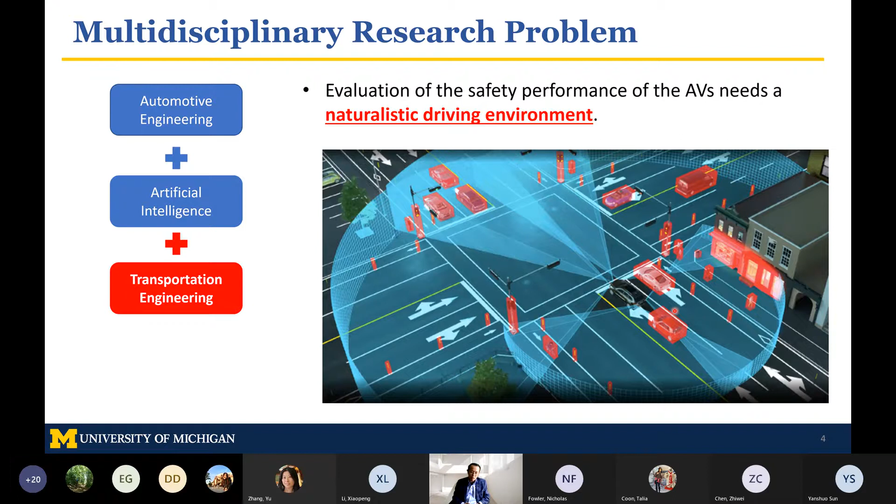So as transportation engineers, we study the traffic environment. We study this naturalistic driving environment in terms of the traffic flow, the traffic control devices, and multimodal transportation. So we do have a stake in it, and this problem indeed is also a transportation engineering problem. And my group has been working on this starting roughly 5 years ago in 2015 and 2016, and was also involved with the M-City test track construction at the time to test autonomous vehicles, which we're going to talk about a little later in my presentation.

So I have repeatedly mentioned the naturalistic driving environment. So what is a naturalistic driving environment? How do we model it? I'm going to start with a set of decision variables, and those decision variables involve multiple road users. Here, let's say all the vehicles surrounding the subject vehicle, and also a time duration. So it's not only a number of vehicles, but also across some time duration, from the current moment to some time into the future. So if we simulate such a naturalistic driving environment, essentially we're sampling from the distribution coming from the real-world traffic environment.

So the challenge to build such a naturalistic driving environment is, first of all, that the dimensions of the decision variables X are very, very high. Think about it: if you model a lot of vehicles over a long period of time, the matrix will become very big, and so the number of variables will become really high. The other one is that when we say we want to test this autonomous vehicle in a naturalistic driving environment, the joint distribution needs to be consistent with that of the real world. And that's also particularly challenging because of the high dimensionality of the naturalistic driving environment.

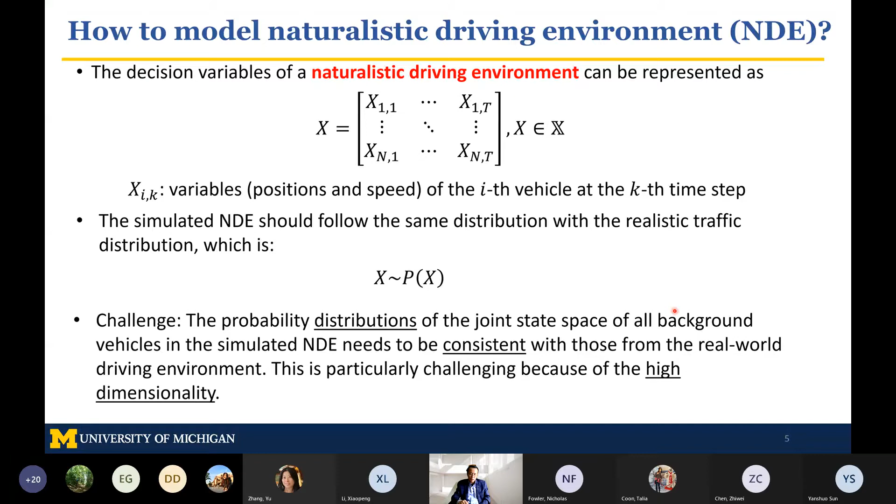And in terms of the high dimensionality, the reason we have such a high dimensionality is because the number of scenarios we need to test is very, very large, it's innumerable. For example, some of the variables could be static variables related with weather, number of lanes, speed limit, and configuration of the geometry. And those are all scenarios we need to consider.

And also there are dynamic variables involved with surrounding vehicles, their position and speed, range and range rate, and cut-in angles and things like that. It's all the decision variables you will need to consider. And remember, this is not only just one vehicle, there are multiple vehicles surrounding the subject vehicle under test.

You also need to consider multiple maneuvers in combination of these, and some of these may be in a free flow driving situation, some in a car following situation, lane changing situation, and so the number of maneuvers to be considered is also very, very big. So if you multiply all these together, there's no way we can enumerate the scenarios we need to test.

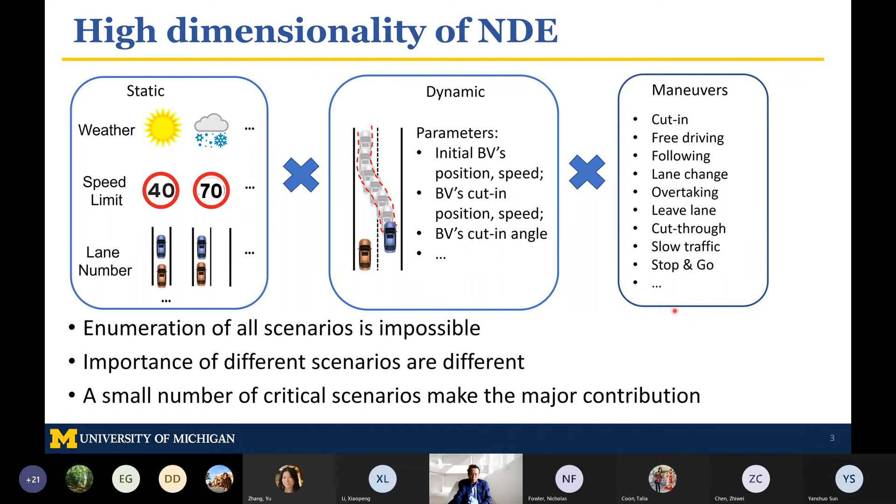So when we say we test an autonomous vehicle, what do we mean? If we put the agent into this naturalistic driving environment, essentially what we're trying to estimate is the probability of an accident occurring, right? A represents the event of interest, which in this case is an accident, and we're trying to estimate the probability of that happening. And we can decompose that into the product of two probabilities. One is the probability of the scenario occurring, that's P(X). And then under that scenario, the probability of an accident occurring, which is P(A|X).

Okay, so if we put this into the naturalistic driving environment and conduct n tests, and out of these n tests, m result in an accident, then the probability of an accident will become m divided by n, right? So that's the probability we're trying to estimate.

The challenge here is that the accident, the event of interest, is usually a rare event. As I mentioned, it's 10 to the minus 6 for an accident to occur, and 10 to the power of 8 miles for a fatal accident to occur. So A is a rare event, and that brings challenges to the estimation of this probability of accident. The reason this is challenging is that the efficiency of conducting this test naively will be very, very bad.

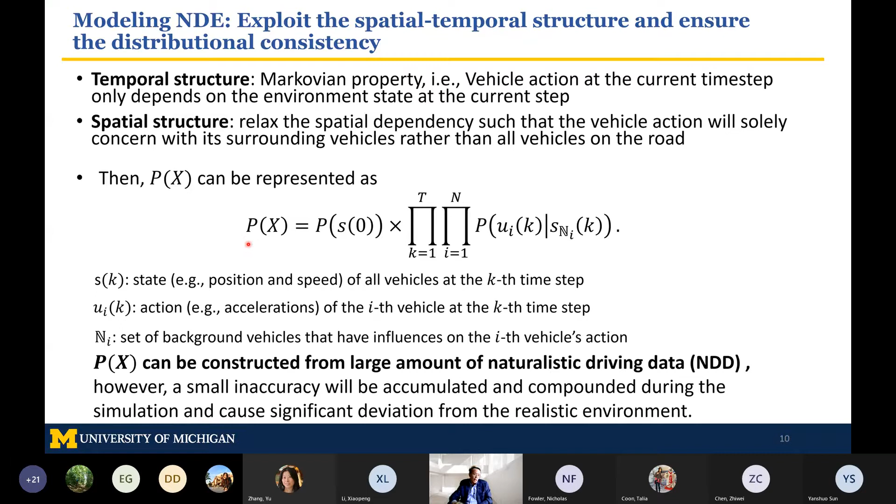And one thing I do want to mention is when we reconstruct these from the naturalistic driving data, we want to make sure that the simulation is consistent with what we observe from the naturalistic driving environment. That's not only for P(s(0)), the initial state. When we initialize, we can ensure it's consistent with the naturalistic driving environment. But once you run the simulation, you want to make sure even after some time steps this probability is still consistent, and that actually turns out to have some challenges.

So that's just a very brief idea of how we're going to overcome this high dimensionality challenge. The other one is the rare event estimation challenge. So we introduce importance sampling techniques into this. Instead of sampling from P(X), which is constructed from naturalistic driving data, we sample from Q(X), and Q(X) is the importance function.

By sampling from Q(X) to estimate P(A), we want to ensure two things. One is that P(A), the estimate of the accident rate by sampling from Q(X), is still going to be an unbiased estimation. If it's a biased estimation, then it's useless to us. So when we introduce this Q(X), we want to retain the property of unbiased estimation.

The other one is that the number of required tests, or the testing miles, needs to be much smaller than that coming from P(X), right? If the number of tests needed is not reduced, then the selection of the importance function has failed as well. So now the Q(X) construction becomes a very important task for us. We want to ensure this is an unbiased estimation that can also accelerate our testing process.

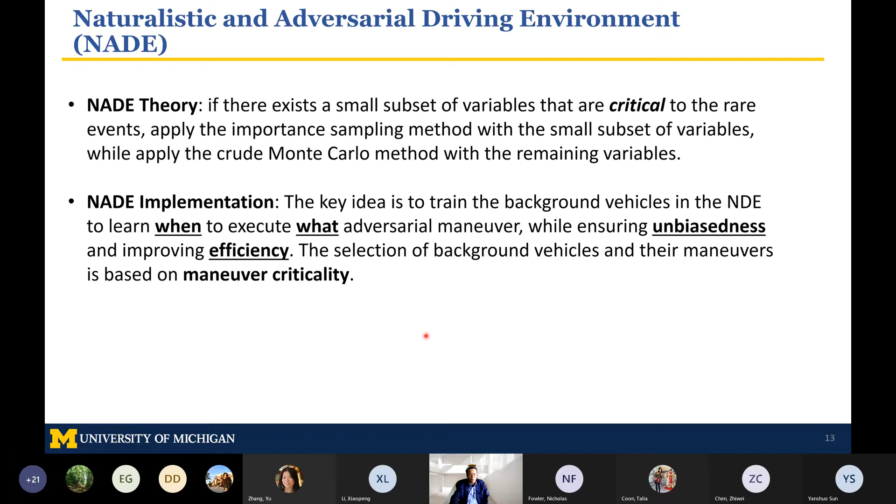And for that we need to introduce another concept which we developed over the years, to calculate the so-called maneuver criticality. This maneuver criticality basically involves two things. One is a maneuver which we have interest in because it is challenging to the autonomous vehicle. If it's not challenging, we're not very interested. The example I gave you: if it's driving on a freeway without any other vehicle surrounding you, it's probably not a very challenging situation, and probably not a situation we want to conduct a long test on.

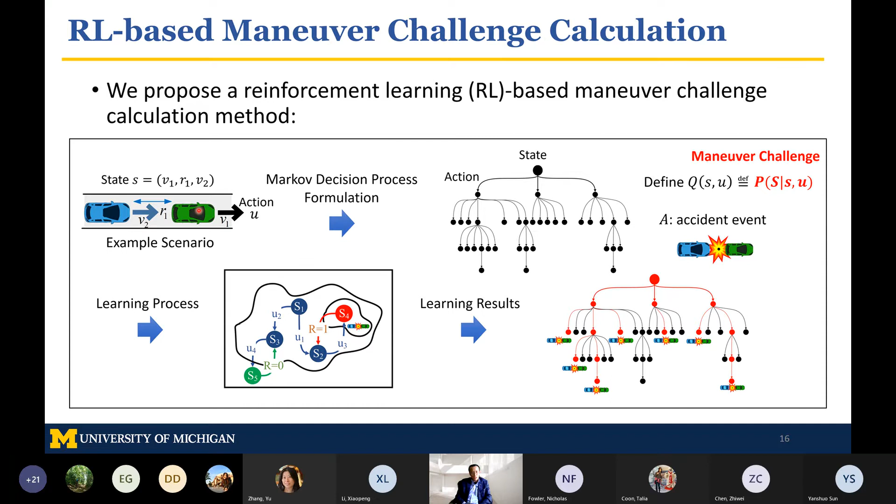So that's why, because this is multi-step prediction ahead, we introduce this reinforcement learning framework and train these models to estimate the maneuver challenge faster. Because we're looking ahead several steps at what the maneuver challenge will be at the end, it's difficult to use traditional techniques to do so. So that's why we utilize this reinforcement learning framework to estimate or predict the maneuver challenge.

Okay, so now, for each of the background vehicles surrounding the subject vehicle, we can estimate their exposure frequency from the naturalistic driving data. We can also predict their maneuver challenge. Then for each of these background vehicles, we calculate every possible maneuver and add them all up. Then we can calculate the criticality value for each vehicle, and we select the vehicle with the highest criticality value, which we usually call the principal other vehicle. Basically, it's the background vehicle with the highest influence on the subject vehicle at the current moment.

So once we identify the principal other vehicle, if its criticality is greater than a certain threshold, then we have a POV which will be able to perform certain maneuvers to challenge this autonomous vehicle. So once we have identified the POV, that moment becomes a critical moment, and from the criticality value we also know which maneuver the POV will perform to challenge the autonomous vehicle.

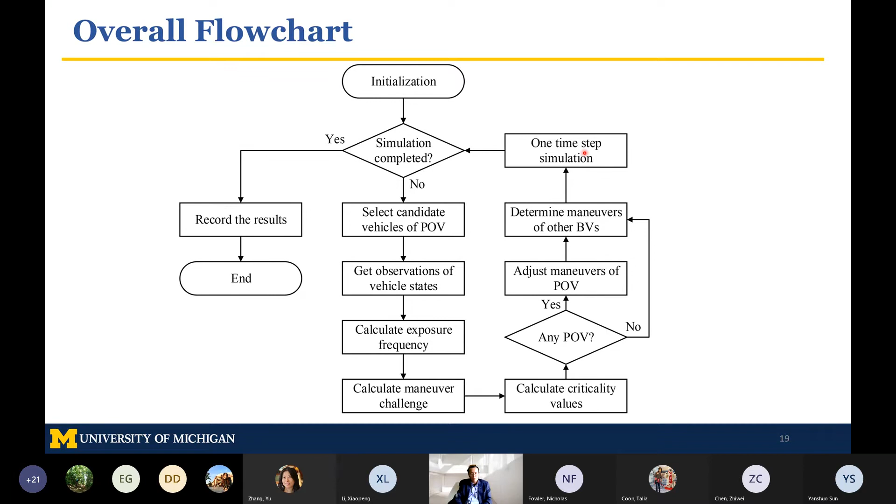So you can see, if you have a loop in a test track, what you will do is you have an autonomous vehicle model, and you're driving on a test track, let's say a loop, and then we can generate all sorts of challenging scenarios to challenge this autonomous vehicle, and the autonomous vehicle can continuously run in this environment, and eventually we'll be able to get the result.

So I want to present some of our initial results out of this, and the data we have utilized is from two databases. This is all coming from University of Michigan's Transportation Research Institute. UMTRI over the years has accumulated a large amount of data, and there are two data sets specifically we're using in this study. One is from Safety Pilot Model Deployment. This is the first connected vehicle deployment project funded by US DOT. At the time, we installed about 2,800 personal vehicles, and out of these 2,800 vehicles, 140 were equipped with Mobileye and also data acquisition systems. So a lot of data has been accumulated from the Safety Pilot Model Deployment project.

The other one was conducted in the 1990s. UMTRI conducted a test on the integrated vehicle-based safety system, and for each of the vehicles, they installed a bunch of sensors. These are all Honda Accords, and we have 100-some drivers rotating to drive these vehicles, and there's also a data acquisition system to record everything that occurs on these vehicles. So these are the two naturalistic driving databases we have been using.

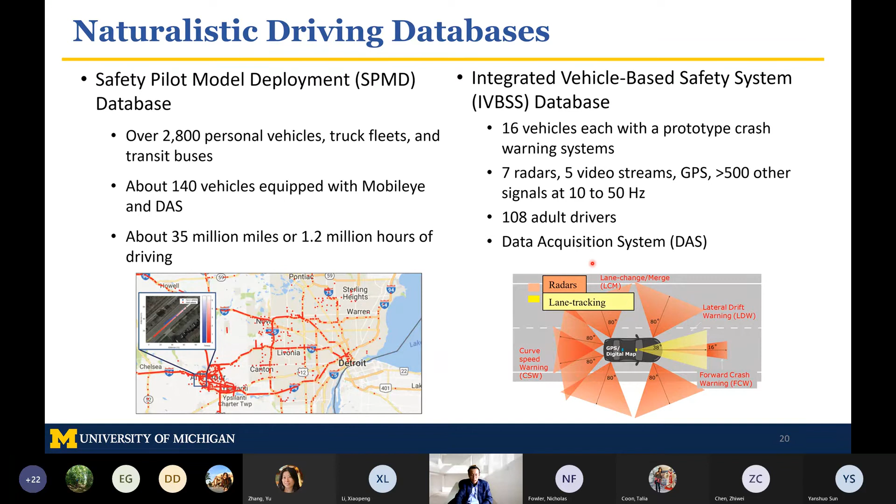Just to give you an example of the data we processed, this is coming from the Safety Pilot Model Deployment project, from the Mobileye data. They are able to detect lane markings. They're also able to generate the bounding box and roughly estimate the object distance. So we'll be able to identify when these vehicles are making a lane change. We categorize the vehicle maneuvers simply into 6 different scenarios: free driving, car following, car cut-in, lane change with no adjacent vehicle, lane change with one adjacent or 2 adjacent vehicles, and things like that.

And then with these, we calculate the exposure frequency out of that. This is just a sample, and we're looking at the different types of measures we have: the acceleration, the velocity, and things like that. Then given all the vehicle states they are in, we're calculating the distribution of these maneuvers. And from that, we apply it to generate this naturalistic driving environment.

To illustrate this, I'm going to give you two examples. One is a simple cut-in example, which is easier for us to illustrate. The other one is a continuous driving environment. The cut-in example is very simple. If you look at the connected automated vehicle, the yellow vehicle and the blue background vehicle, we're only concerned about the moment of the cut-in. So there are two variables we are concerned with: the range between the two vehicles, and the range rate, which is the relative velocity between these two vehicles.

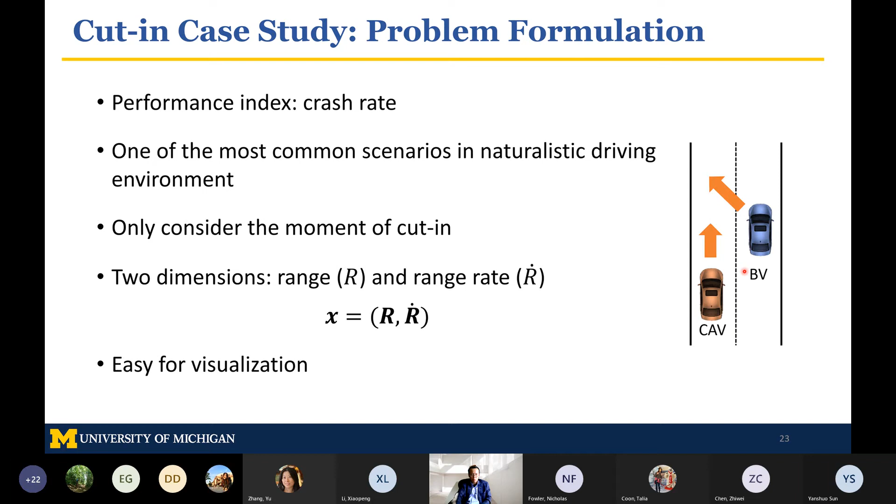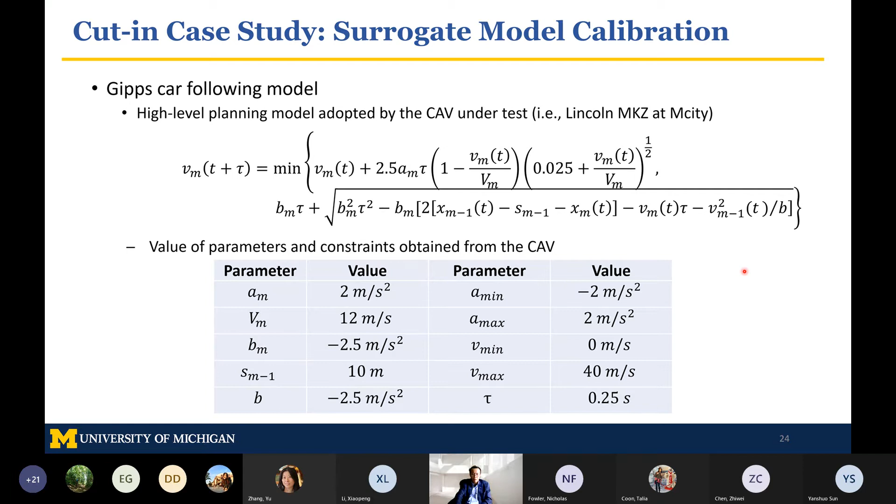The reason we use that simplification is because two dimensions are way easier for us to visualize. The surrogate model we use is the Gipps car following model. It's a well-known car following model in the traffic flow literature, and those are the equations we utilize. These are the parameters, and you can check all of that from the paper. And this is coming from the Safety Pilot Model Deployment, so that's the data set we utilize.

On the right-hand side is the exposure frequency. So basically, we look at all the cut-ins, roughly about 400,000 of these from the data sets. You look at the moment they are doing the cut-in, look at the range and range rate, and look at the frequency of that. So this gives you the exposure frequency on the right-hand side.

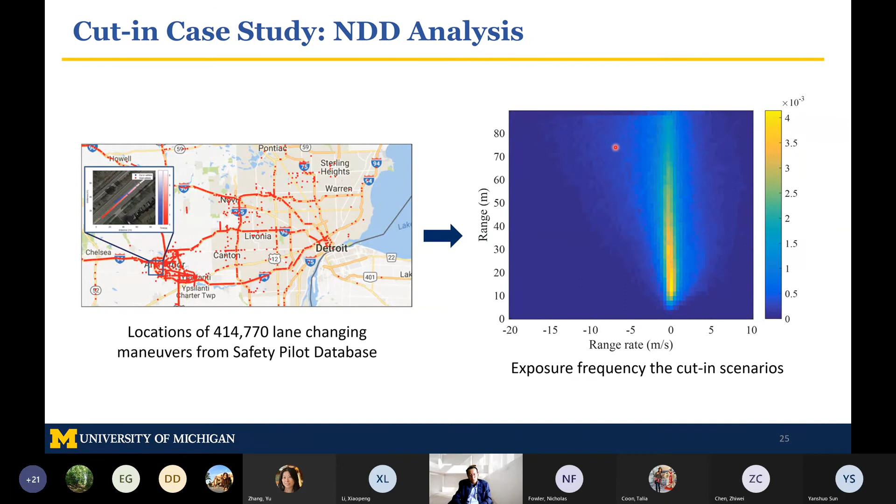And then if you do a naive naturalistic driving environment sampling, you sample from this data set to do the test. And what we do is, for the specific situation, we'll also calculate the maneuver challenge, applying that Gipps car following model.

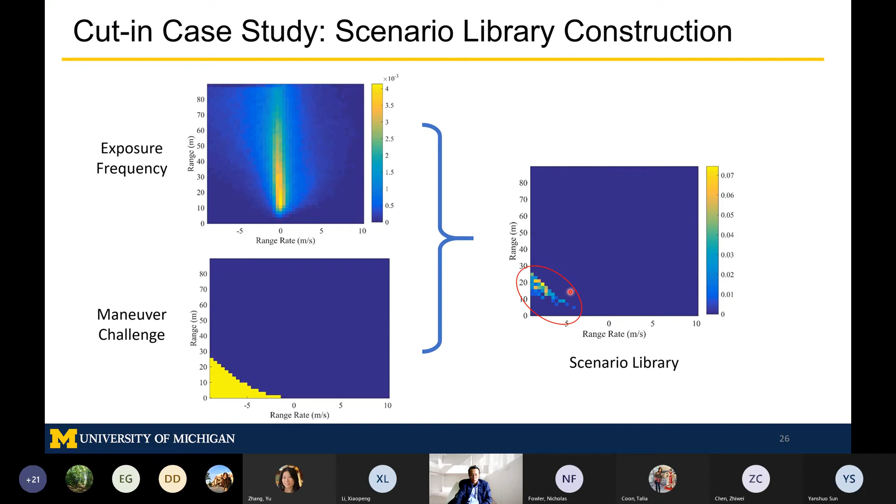You can see only this small state will create challenging scenarios. So you multiply these together, and this will give you a sort of scenario library. And then you basically only sample from the selected scenario library, and that will significantly speed up your testing process. So we test these not only in the simulation but also in the test track. As I mentioned before, University of Michigan has an Mcity test facility.

So what we do is we have a real automated driving system. This is the Lincoln MKZ from Mcity. This vehicle will be driving within the Mcity test facility. And in parallel, we run a simulation, which is the VISSIM simulation, and the simulation model will generate background vehicles, and the background vehicles will be packaged into basic safety messages.

We send it to the roadside unit and broadcast within the Mcity facility, and the Lincoln will be able to receive that. So although the Lincoln is only driving in an empty environment, it looks like it is driving in a naturalistic driving environment. Okay, so this is a video I want to briefly show you. On your right-hand side is the simulation. You can see this is the Lincoln driving within the Mcity on only the highway stretch.

For this particular situation, this is the subject vehicle, and the red vehicle is the background vehicle cutting into it. The previous case is a no crash, and this one is a near miss situation, and it shows you the range and range rate, so you can see they're getting very close. And another scenario is the crash situation, and you can see this is the subject vehicle under test, and there's another background vehicle doing the cut-in.

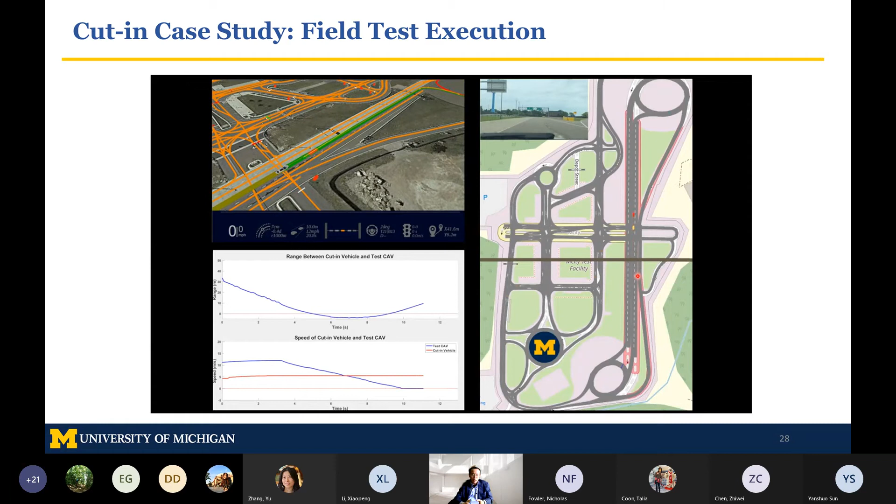Although we only consider the cut-in moment, just to simplify this, the naturalistic and adversarial driving environment can run this continuously. And they can generate not only the cut-in situation, but also lane changes and all sorts of other conflicting scenarios.

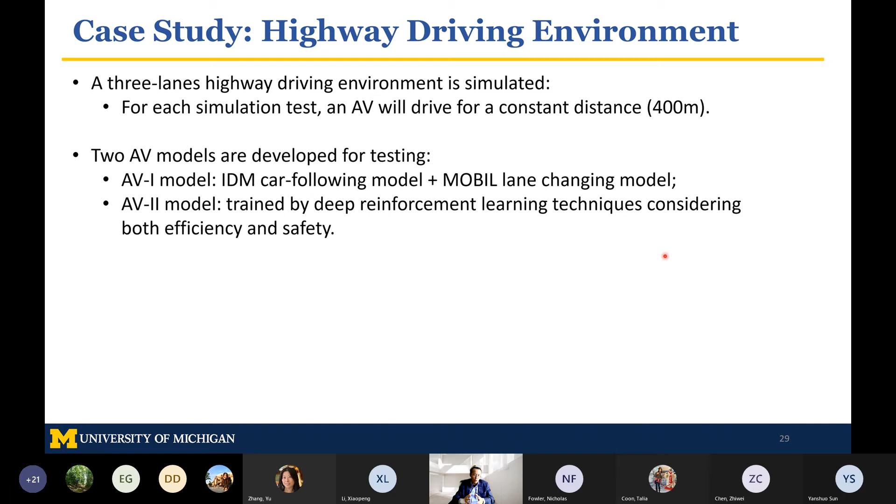So as I mentioned, we have a continuous highway driving environment built upon this naturalistic driving environment, and we built two AV models. One is based upon the intelligent driver model and the MOBIL lane change model. The other one we trained ourselves utilizing deep reinforcement learning techniques. The surrogate model we use is IDM plus MOBIL, calibrated by naturalistic driving data. AV1 utilizes the same model, but with different parameters, to do the test.

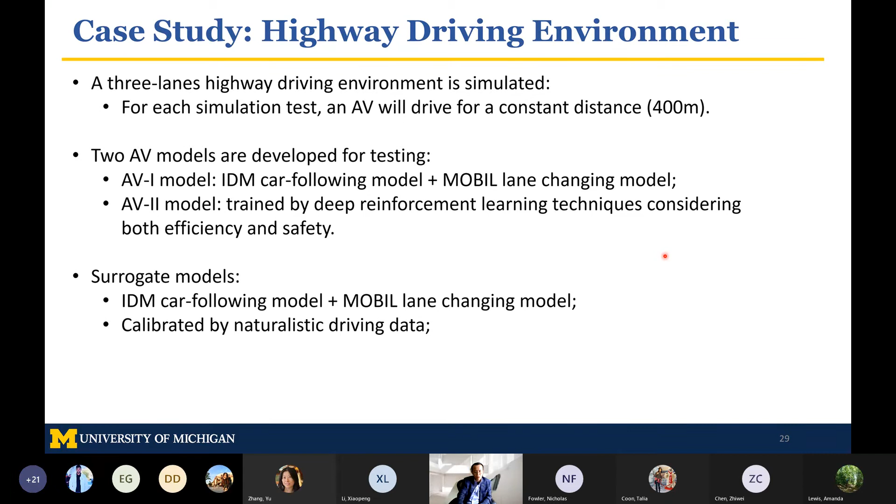So I'm going to show you a couple of these, let me see. I'm going to show you some adversarial examples coming from these tests. The blue vehicle is the subject vehicle under test, and all of these green vehicles are background vehicles. If you see a red box, that's being identified as a POV, and the POV will conduct certain maneuvers to challenge this autonomous vehicle. You can see the first example results in a crash situation.

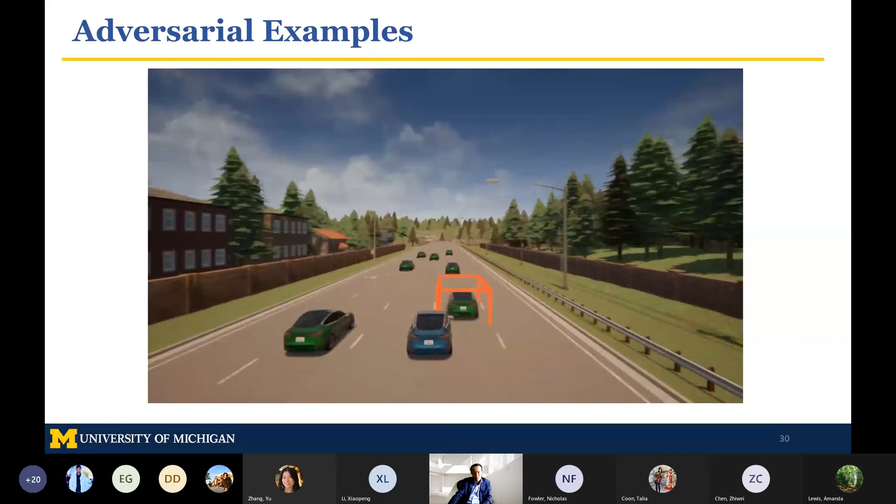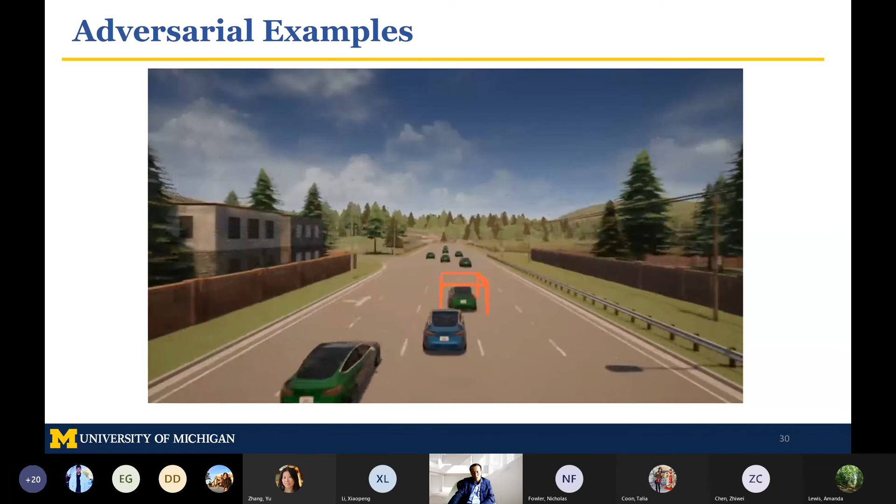So this is a sort of lane conflict situation. This is another scenario, a car following situation that results in a crash. Okay, so that's another of these challenging examples which at the end results in a crash.

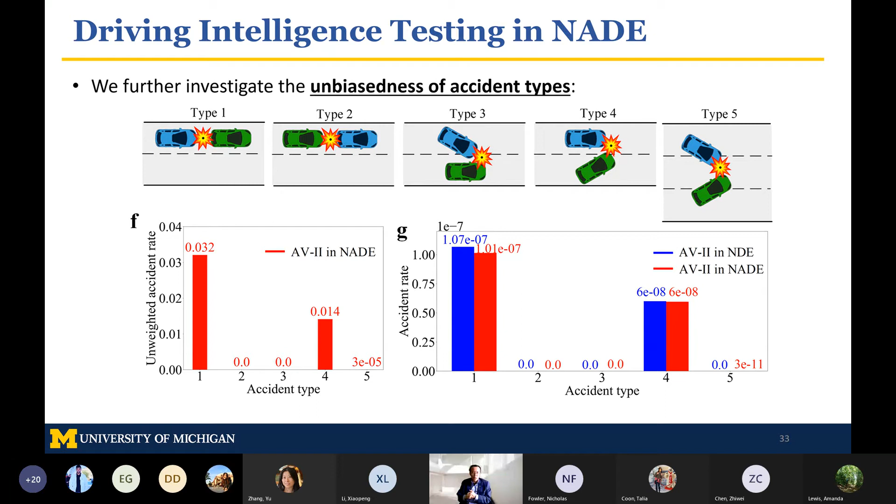We also verified, in the highway scenarios, what types of accidents will occur. These are the different types of accidents that occur in the naturalistic driving environment, and we verified that with the naturalistic and adversarial driving environment as well, and you can see that the number of accidents and the accident rate in NADE compared to NDE are very similar as well.

So with that, I presented this AV testing problem, particularly its relationship to the transportation engineering field, and I also presented some of our initial solutions to it. By no means is this the end story or a complete solution, and there's still a lot of work on these. We are also continuing to explore further.

Since I presented pretty fast, if you'd like to know some of the details, I invite you to look at some of the papers we have published in the last year. The first three are what we published in IEEE Transactions, related to scenario generation utilizing the maneuver criticality concept we developed.

The fourth one is actually putting it into a test track, not only in simulation, applying this technique in a test track situation. And the latest one is in Nature Communications, which is an illustration of this naturalistic and adversarial driving environment.